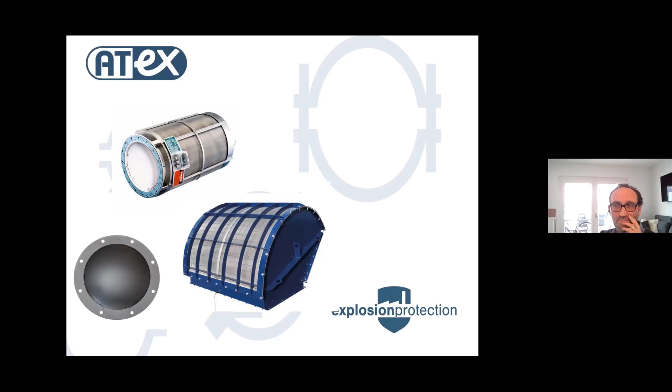As in many other areas, we are breaking new ground here. We are the first manufacturer to have an online shop for vent panels. The price is transparent, independent of quantity, and delivery time is specified for 48 hours, worldwide. So it's quite new on the market.

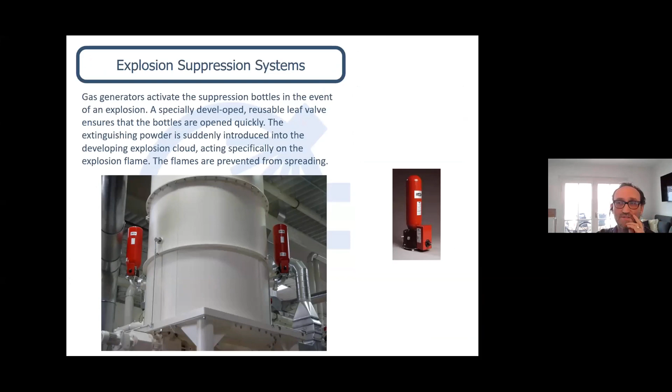Here are some examples of explosion suppressions we have, with a focus on low follow-up costs, and the customer can refill this themselves.

And here you can see we are the only manufacturer that has explosion protection with hot water. Inside is filled with hot water, permanently heated at 180 degrees. In case of activation, we trigger water or steam to extinguish the explosion in the vessel. This is very interesting for the food industry.

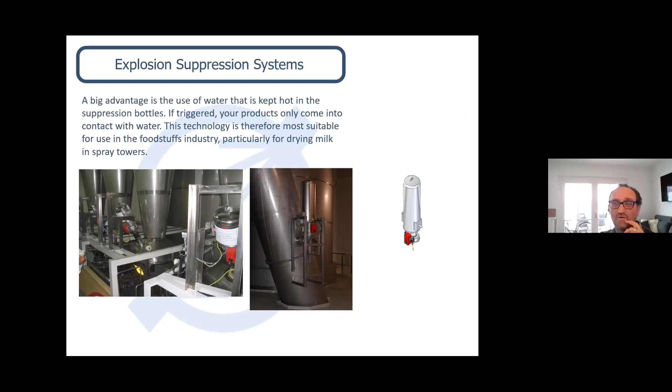Of course, we also have mechanical isolation, the quick closing valve, which can be used in many ways. Most importantly, it cannot be destroyed after fast closing, even because of an explosion. You just press a button and it's ready for the next explosion, so there is no destruction.

For example, there was a question before about the food industry needing a clean surface inside the valve. So we developed a system for this valve which cleans it permanently. This could be interesting for some of you.

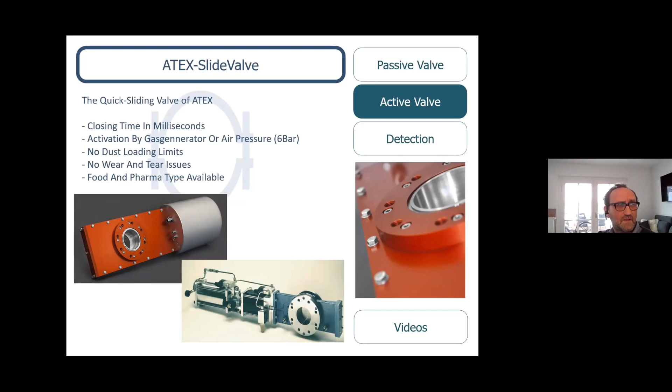Many notified bodies come to us and use our test field because we have more options than they have themselves. This includes DEKRA, INERIS, LOM, GEXCON, just to name a few. Customers also build entire systems to carry out explosion tests here.

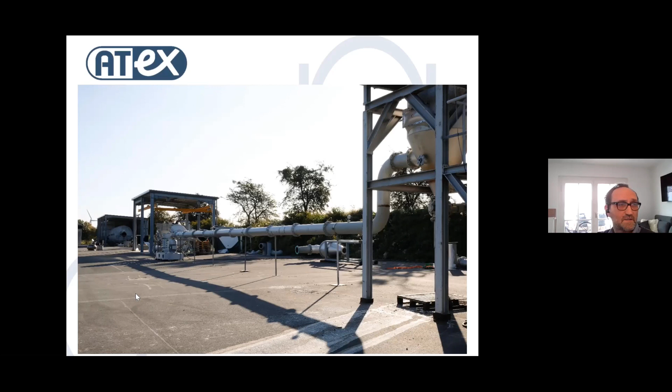But why are we doing this? This is our 25 cubic meter vessel. Here you see a complete plant from a customer to test. Here we have tested our float valve, DN 800, for a gas test.

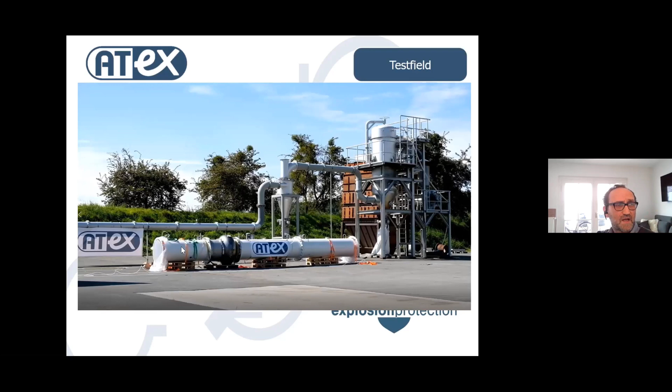This side will be filled with gas, and the valve will be closed. You make an ignition here, and the explosion has to rise up on that side, but not on this side. I will show you, I hope this will work now. I will show you why it's important to have a test field.

Can you see this movie? Yes, we can see it. It's okay, and it's running fast.

So this is a normal explosion. Please stop at the flame. It's too quick, you see, it's too quick. So what you can see here is how fast an explosion happens, how the flames come out. What could be interesting... oops, made a mistake, sorry.

What could be interesting is when we make the same explosion with a suppression system. I will stop this before. This is the same vessel. Now we are creating an explosion here inside with starch, an ST1 dust. But you will see...

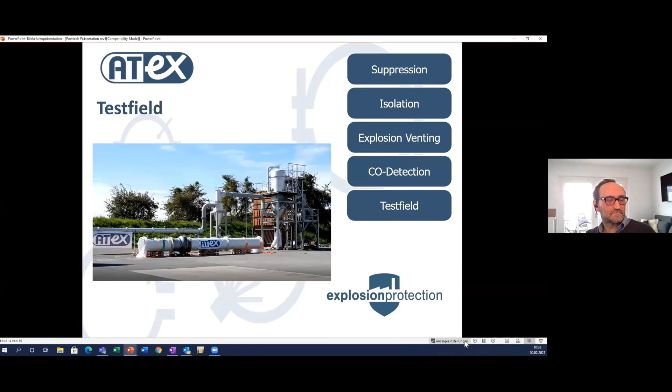Okay, I want to go back to the application. I want to speak with you. One of our customers has asked us for a protection system. Because of confidentiality, I will only show you key data.

Here this could be a dryer or a mill, and this a filter or a cyclone. Everything is designed for 10 bar. Here we have no dust loading. Here comes the fresh air inside, and here we could have a dust loading. The customer said, according to the explosion document, we can create an explosion here in that vessel and also this vessel.

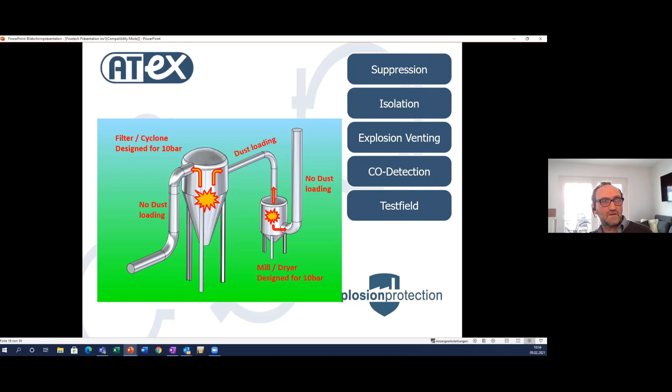In the past, this customer has had good experience with our float valve, our passive isolation device. Because of that, he wants to have the same solution. So this was the solution he wanted to have.

Here we have the diameter of 800, 500, and also 800, and so on.

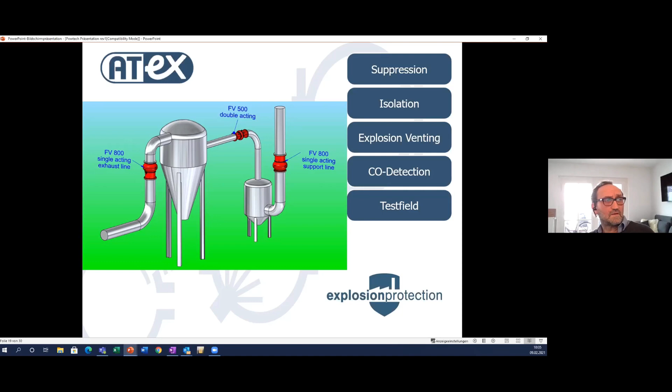At the end, this was what the customer wanted: a single acting valve with an explosion in the flow direction. Here the flow direction is this way, and the explosion will have the same direction. Here it's the opposite, explosion comes from here, but the flow comes from that side. And here we have a bidirectional valve.

We could have vertical positions and also horizontal positions. They could have a high dust loading, and also pipings directly in front of the valve.

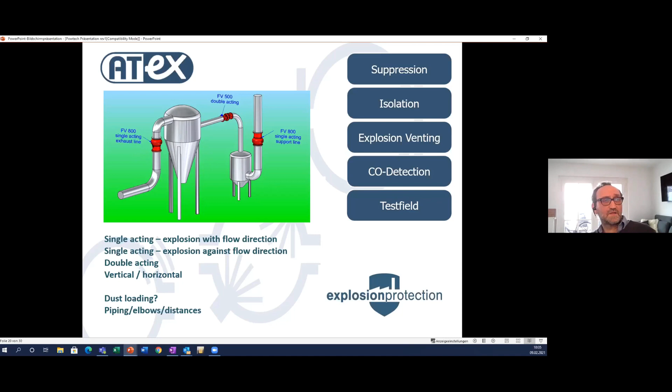This could be different, because I'm sure some of you know a similar explosion protection valve, but this was the list of what we wanted to do against the other solution.

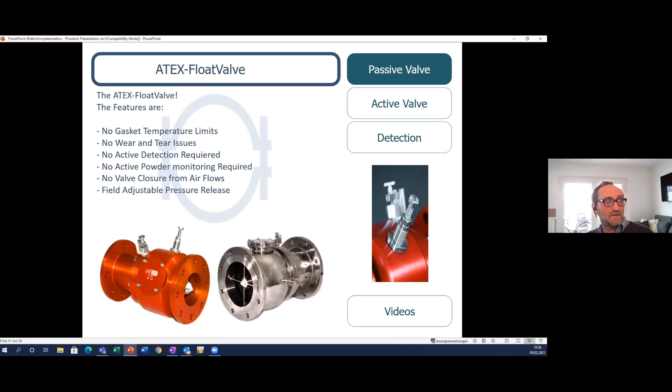We want to have no gaskets inside, so we have no temperature limits. We want a passive valve. We want no powder monitoring. We want to design a valve which will work independent of the dust loading, and it should not be closed by the airflow. So for sure, the same with the double acting valve.

So here you can see what we have designed. Here we have no gaskets in the passages, no gaskets which face the process. So no problems with temperature or solvents inside, no problems with aging of elastomers.

The closing element, the ball, is fixed by this latching device. It means if you have a pressure wave in your pipe or different airflows, for example when starting your process, or because you have elbows in front or behind the valve, we are independent of this because it's fixed. Waves cannot move the ball. We have no springs here in this angle, because we have fixed this closing element with this latching device.

On this latching device, in the middle, there is a ball that is under spring tension. This spring defines the air velocity, meaning it could be increased from 20 to 25 or 30 meters per second, and you can change this yourself without moving the valve. For example, if your airflow is designed for 20 meters per second, but later you see your airflow in the pipe could be higher, what you have to do is turn out this latching device, just this, and put a new one inside. This is allowed for you to do yourself.

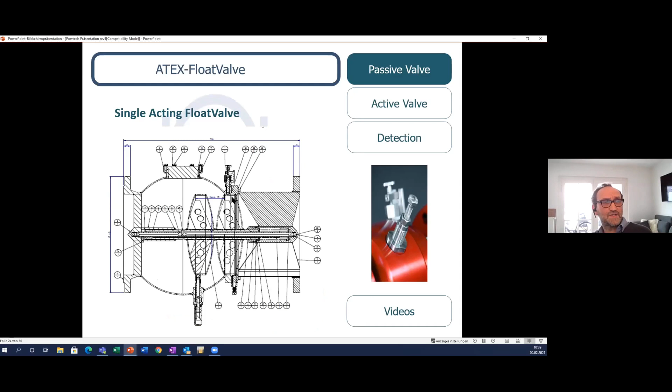The notified body where we have certified this for 8 years, they didn't want to certify this for us at first, but now after we have installed this for more than 8 years, after having this successfully used for these 8 years, they have permitted it without any limitation of the dust loading.

So the valve is always closed in the event of an explosion. So for sure, we will never say to you it's applicable for a filling line of a silo, because this closing element could get stuck when you are transporting 200 or 300 kilograms of product.

But what we could demonstrate to the notified body is that it will definitely close, also with this high dust loading.

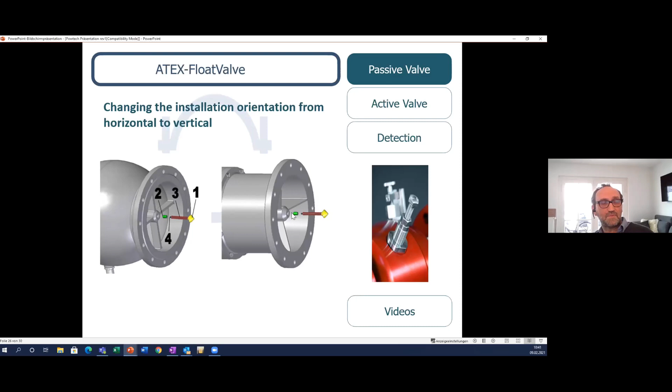Another difference compared to others is when you want to move these from the horizontal to a vertical position, you can change this very simply. You only have to move the latch, or close it. So, like I said before, you can do many things yourself without us.

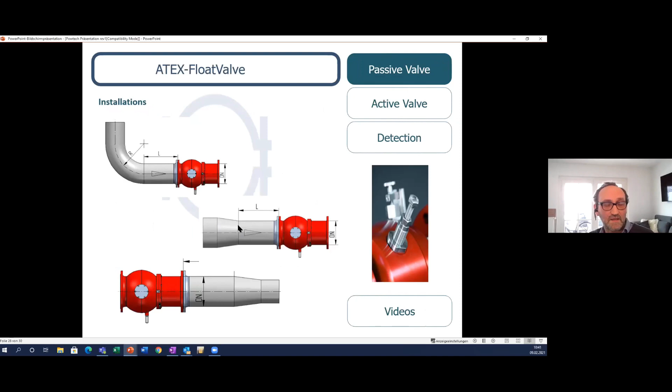Here you see the restrictions we have, and you can limit this. You can put the elbows and the reduction of the pipe directly in front of this valve.

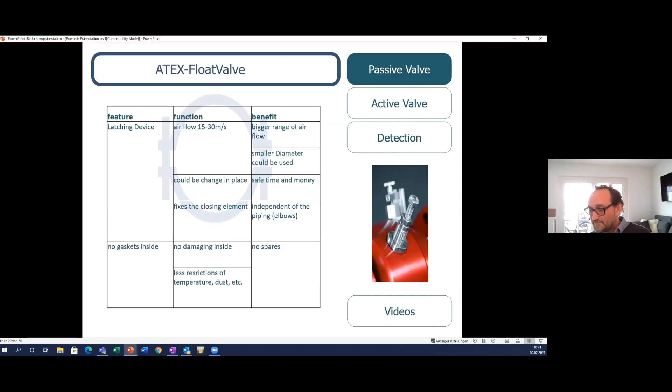And there are questions, Mr. Kammerer. Okay. Yeah, thank you, Guido, for the explanations. And yeah, I asked directly Mr. Hoffmann to open his mic and ask you, because he had one question about the pharmaceutical industry, and I will add to his question another question. What is about hygienic design, especially for the pharmaceutical industry and the nutrition industry? So, Mr. Hoffmann, please ask your question. Okay, hello everybody, do you hear me?

Yes, all right. So I'm quite new to this topic anyway, but what I heard a lot of times is that everybody's talking about bar. Now I'm hearing 10 bar safety protection. What is the difference between these so-called 12 bar machines and vessels and 10 bar ones? And the connection was not so good for me.

You have asked for 12 bar or 10 bar? Oh sorry. It is correct, what's the difference? Most of the time I hear it's certified for 12 bar. Oh boy. Yeah, that was the main question: what is the difference between 10 bar safety and 12 bar safety? Because in the pharmaceutical industry, everybody talks about 12 bar.

Yeah, so we have no limitation on it anymore. Like I've said, DEKRA has accepted that there is no limitation in the dust loading. The only point is whether it makes sense from the process side or not, for example if you have a small pipe, in DN100, you have small gaps inside.

Can you still see my presentation? Yes. So if you have a DN100, this is a DN100 valve, these gaps could be too small for your process. So there might be some restrictions for your process, but not from the explosion protection side.

The valve will close independent of the dust loading you have, because we will cut it here. If it's full of product, we will cut it. This is what we can demonstrate.